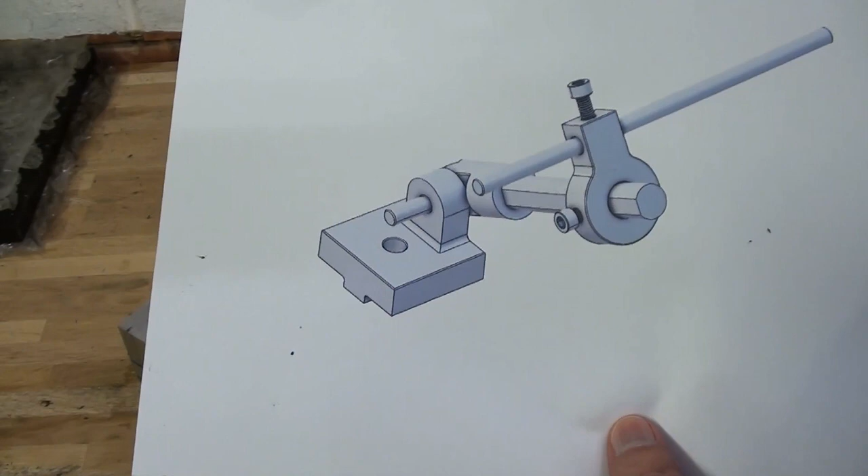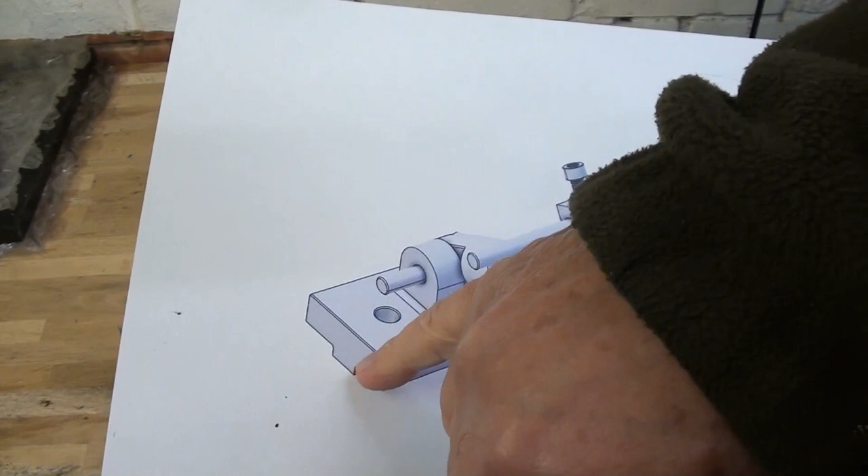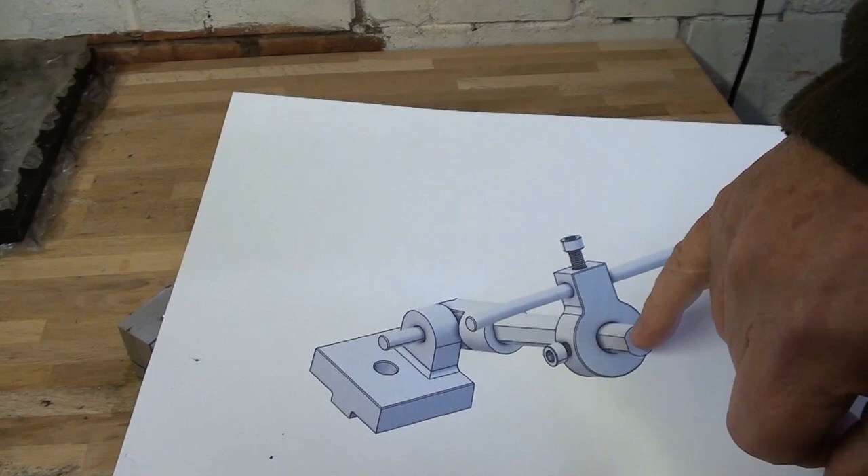Here we are then over at the bench. This is the design concept, very slightly different to what I hope it will turn out to be. There's a mount which goes onto the mill table located in the slots, an upstand mount, and the arm here revolves around this. This is a bolt tapped into here, and then a sliding clamp goes on to this arm, and a further arm goes through here, again clamped with a set screw, which will come up against the work in the vice. Usual sort of thing. And these are the ingredients minus the hardware.

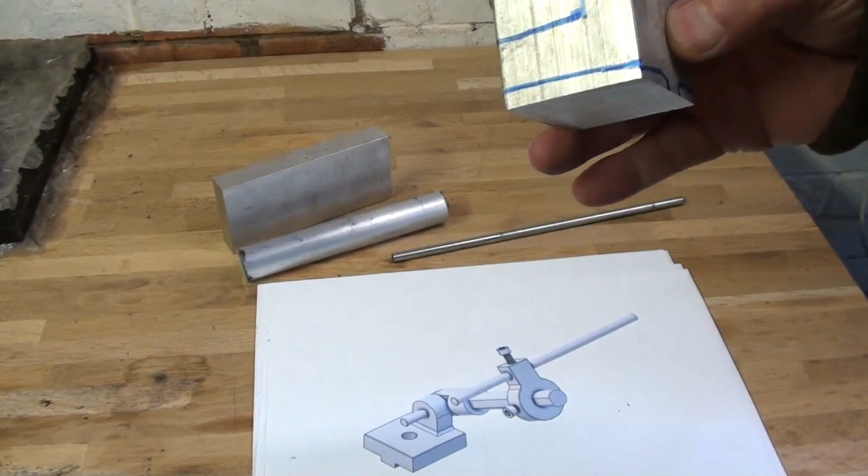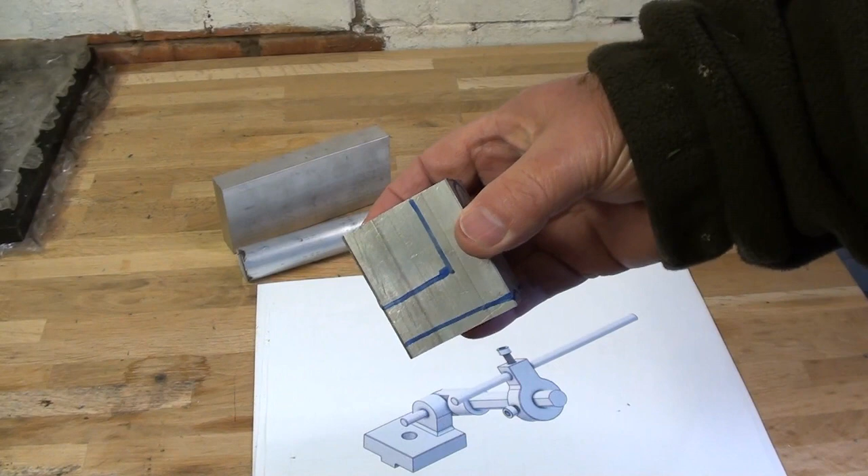I've not exactly marked out, I've just put the shape on this bit of aluminium. All this is stuff from the scrap box, by the way. I haven't had to go out and buy any material. Just so that I don't get it wrong when I mount it in the mill and carve a great chunk off that I shouldn't have done. I don't actually mark out on the work where I'm going to cut, because that's all done with a DRO.

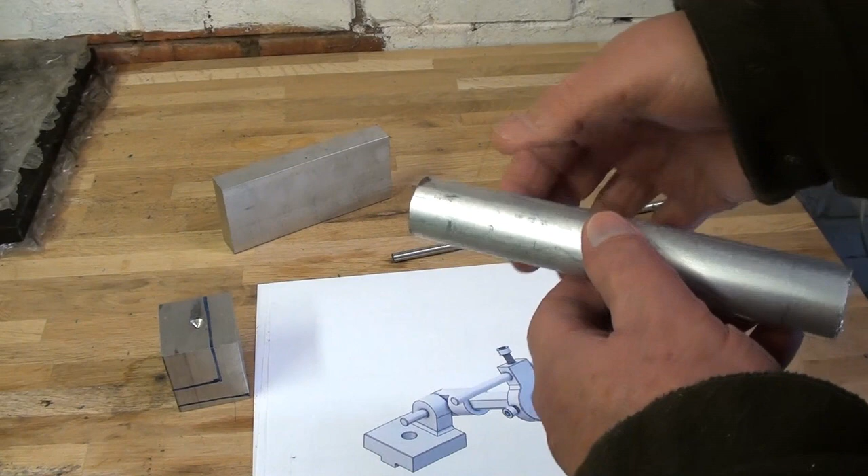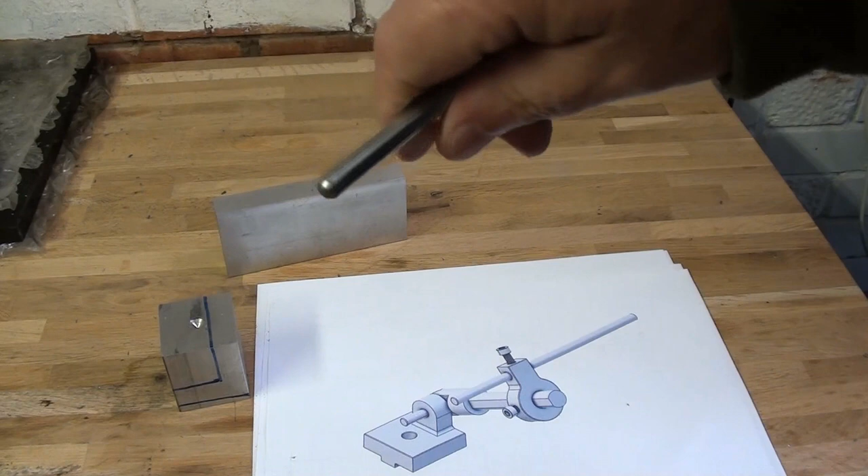Here's the arm. This is 1-inch stock. I shall turn it down to 25mm for a short length, and then 16mm out here, which forms this part. The clamp will be made out of this bit of 15mm thick, I think it is, or maybe it's even 20. Let's have a look. It's 20. So that should give me plenty of room. And there's a bit of an old printer, I think, that has happily got a nice rounded end that will go on here. And well, let's see how it progresses.

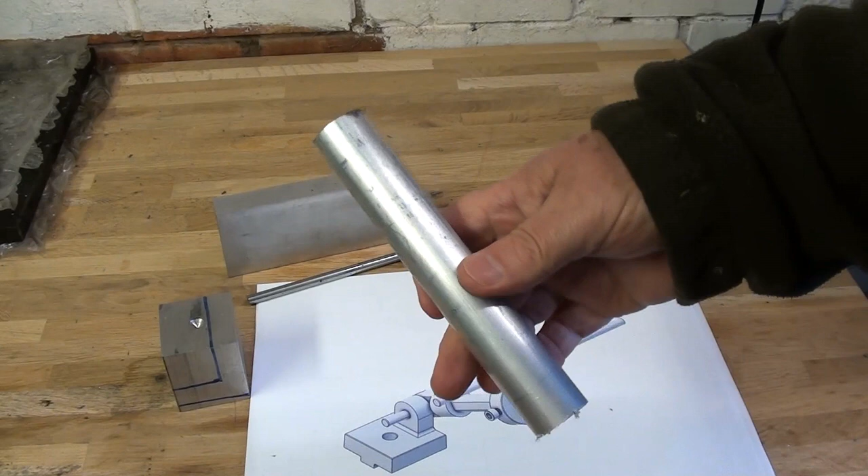First off, I'm going to make the arm. So I'm going to stick this in the lathe, turn it down to 25mm for this section, and then flip it round, hold it by the 25mm section and turn down the 16mm. That'll then go over to the mill, where I'll put the flat on and carve away the ends and drill the hole through. Right, first off to the lathe then.

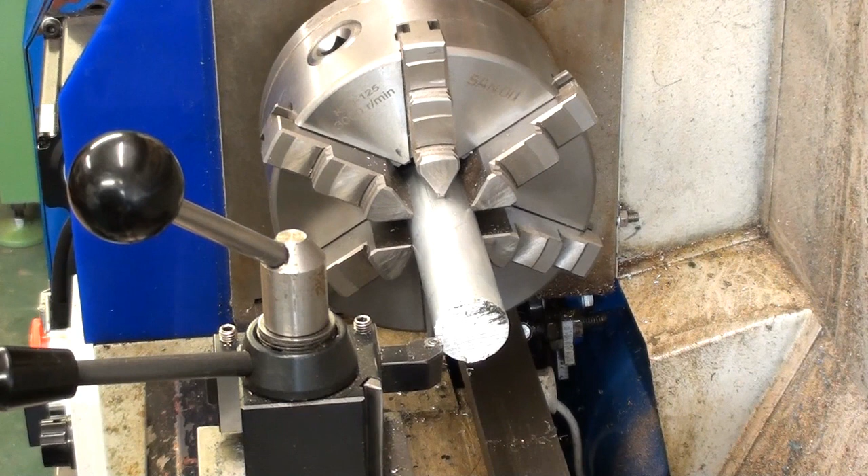First job on the lathe now is to face off the end and then turn down the outer diameter to 25mm, purely for aesthetic reasons actually. So let's get on with that. Taking off 0.2 mil each side. Speed is 581 RPM and the feed rate is 5 thou. Doing it in inches because I forgot to switch to metric.

Yeah, there you go. That's got the centre in. You saw me put a squirt of WD-40 on as I don't have any kerosene, just to ease things along. That appeared to help the cutting, so I might try a spray of that as I'm doing the turning as well, just to get things moving along a bit. And just swap the chuck out for a revolving centre, which is still in its box, of course. Oops, here we go.

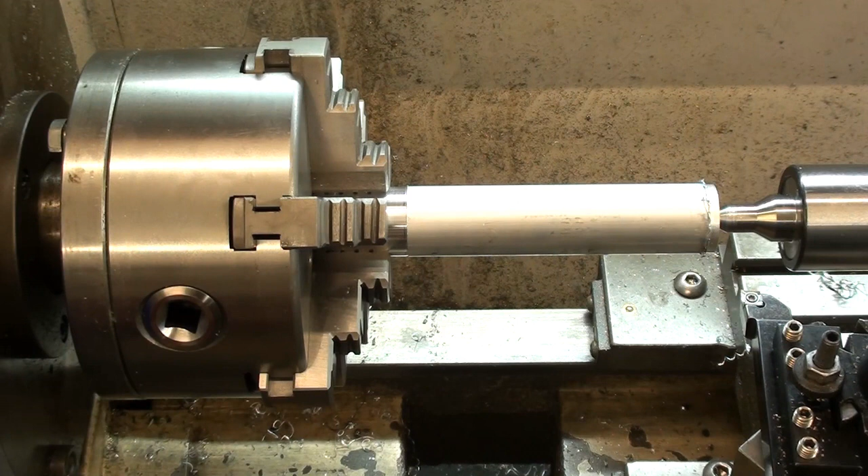I think I might move the camera and see if I can't get a better shot. Well, I think that's a better position for the camera. Not necessarily better for me though, so I've got to work around the tripod, so if the picture goes a bit wobbly, that's why. And just clear there.

Hopefully you can see the contrasting finishes. I'm not going to put my fingers in there, but this is at 0.1, and the other side is a much faster feed. Getting into the bird's nest now. Give that a quick measure, see how we're getting on. It was 20 before that last run. That is now a smidgen over 18, so a couple of runs like that and we should be down to size. I'll take it a bit slower as we get closer to the dimension.

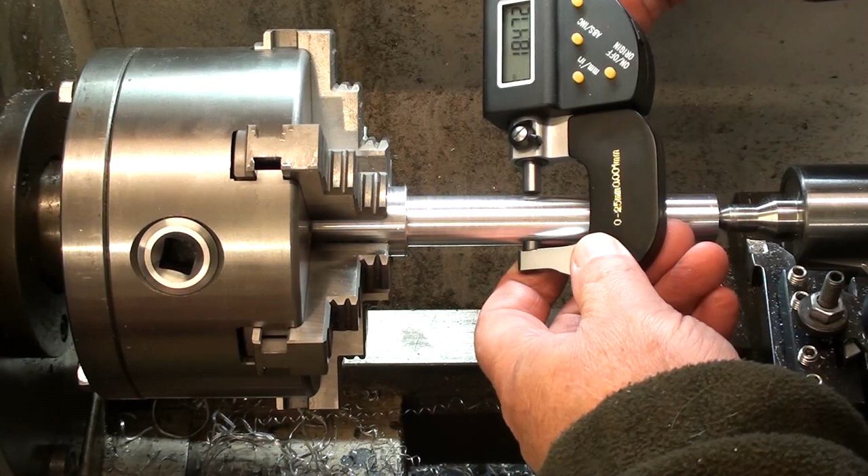Absolutely no reason to work to these limits, but I've got one, so I'll use this digital micrometer just for a laugh, just to see how we're getting on. We're down to, can you see that? Yep, I think you can. 18 and a smidge. So another couple of millimeters off that, and we'll be down to size. Forgot where I was now. Right, I'll take another run and bring you back in a minute.

Turned out a fraction over 16mm, but the hole in the clamp will probably come out oversized, so I'm happy with that. And I'm just going to break the corner here and here.

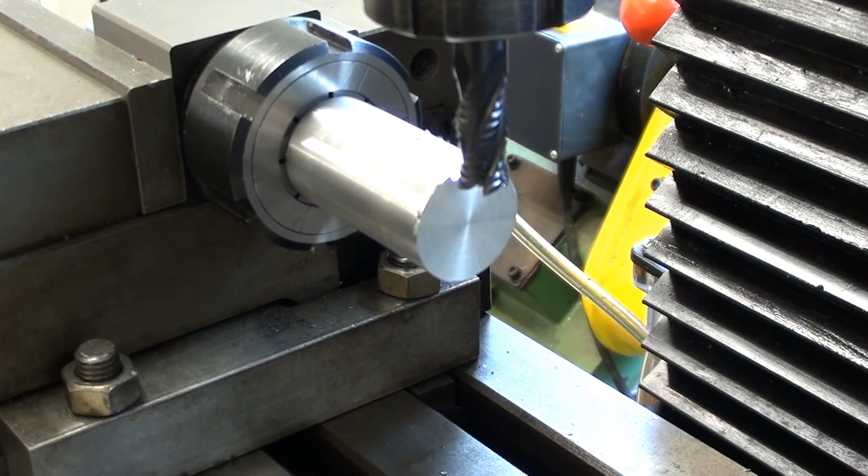Right, luckily none of the dimensions on this part are super critical. I've got to mill a flat across here and one on the opposite side, so when I've done this one I'll flip it over so that I end up with a parallel sided, I don't know what you call it really, stick out 15mm wide.

I've zeroed the Z axis on the top here, got a roughing end mill, brought it up to the end and zeroed it off there, and I've got to go in 30mm. So I'll take a couple of cuts and then bring you back later.

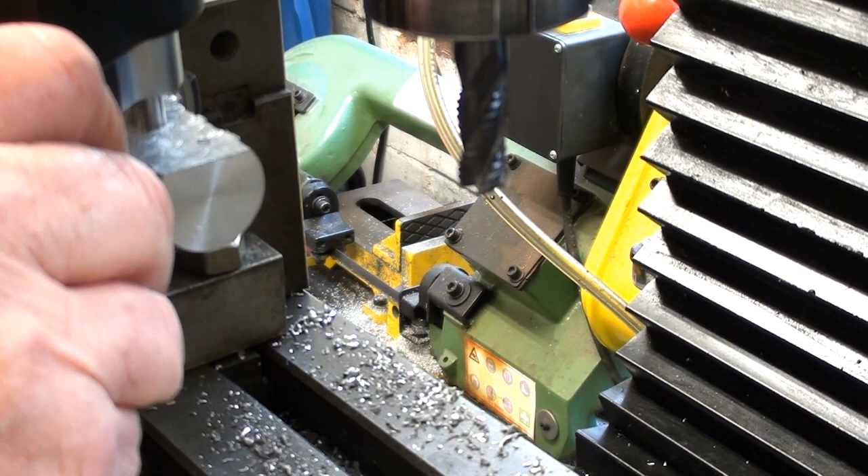A couple of burrs there to take off, but I think we're alright. There we go again. Oh, come on. Yeah, nice and snug. Chat over. But like I say, it's not critical. And I'll flip it over and we'll do the same on the other side, and then I'll drill the hole in where the hole's got to go.

As you can see, I've flipped the workpiece over, taken off the required amount, so now I've got 15mm thickness here. I've put in a centre drill. No, it's not a spotting drill. Zeroed off in the end, gone in Y, halved it on the DRO, and I'm about to drill a hole through here, and then I shall ream it 8mm for the bolt to go through. Off we go.

I'm just using the spindle for this, just to put a little hole in there. Oh, not even a hole. I need to drop it down. And as if by some crazy magic, there's now a, well, it's actually a 7.5mm drill in there, because I haven't got any slightly under 8, so I'm going to have to do a bit of iffy reaming, but this will put a bit of a clearance hole through.

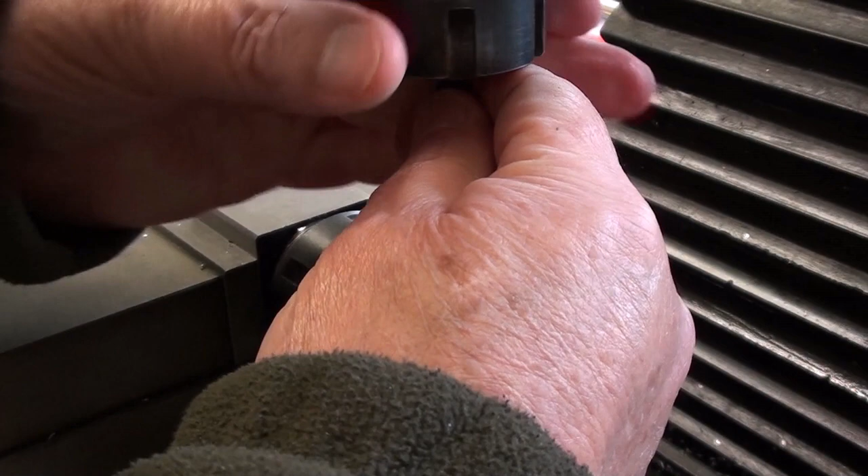Right. I've got to put a flat on this end which is parallel to that, so can't get at it all. I think I know how I'm going to do it, and I'll bring you back when I've set it up.

Alright, here's my solution then. I've clamped the piece in by the machined faces in the vise. Got it sticking out far too far, and I haven't got a machinist jack which will fit under here to support it, so I'm hoping that by going carefully and taking maybe a couple of cuts, I only need to put a small flat about 5mm wide there, it won't flex too much. Time will tell.

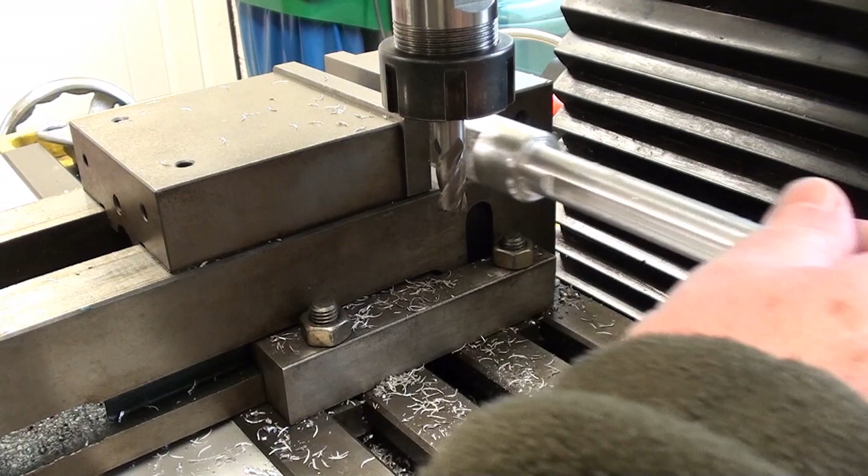Well, apart from rounding over the end, that's that bit finished. And there's the flat. I can't quite get the light right, but there we go. So now I'm going to have to mount that on the rotary table and just round over the end. It would work like that, but wouldn't look very pretty. Anyway, on to the next bit.

Well, there we are. I see from starting to edit this video that we're already up to around 30 minutes, so I think I'll stop there. And the next one I'll be turning this into something a little more interesting to look at.